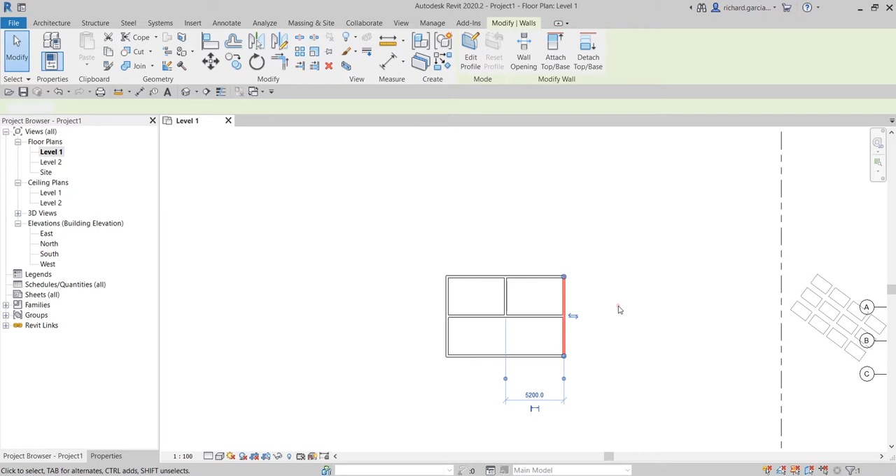All right, so the first option that we will be talking about is select links. This is the icon for select links. As you can see, it is disabled. By the way, I have here an AutoCAD link file, then I have here just simple walls I created, and then I also have a Revit link model.

Okay, so the select links option, when you enable it, lets you select link files and individual elements in the links. So what are those link elements that I'm talking about? Link files can include the following: our Revit model, our CAD file, and even if you have a point cloud linked inside your project, you can also control the selection of that using this option, select links.

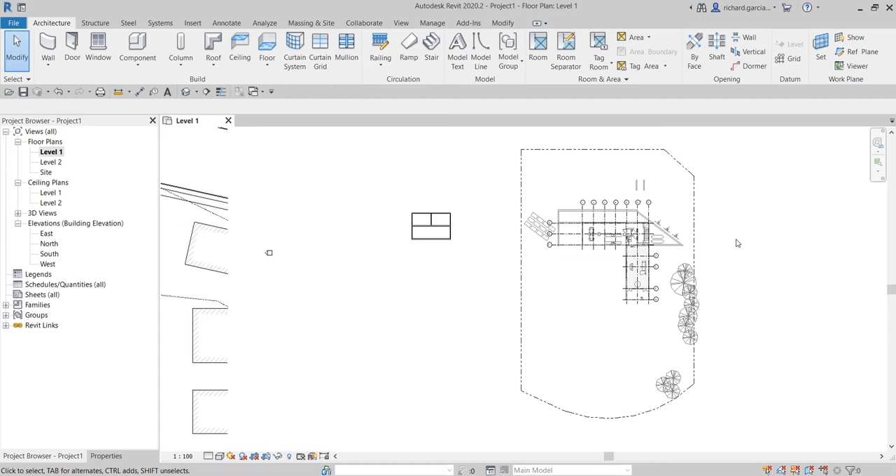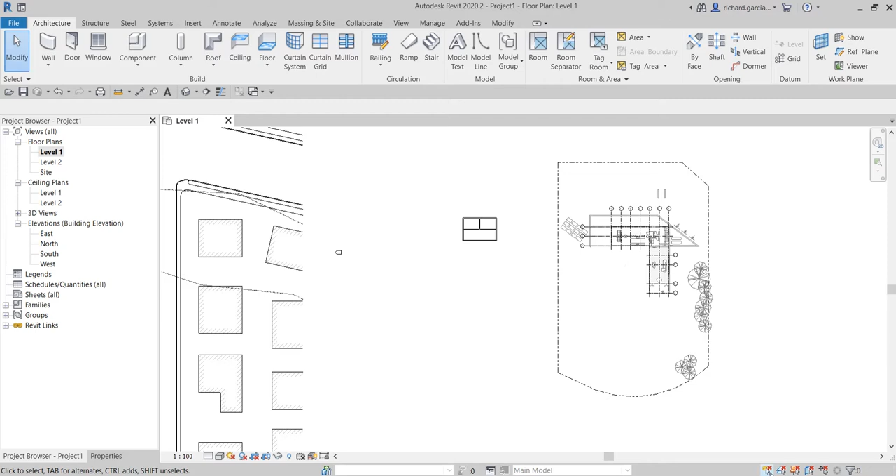Okay, so if this is disabled, as you can see, it's an X, and if you go here, it's unchecked, right? What will happen is you will not be able to select it. By doing that, you will not be able to accidentally move, delete, or drag your link model to another location, which is pretty useful. Usually when we set up our project, we set the select links option to be disabled or unchecked.

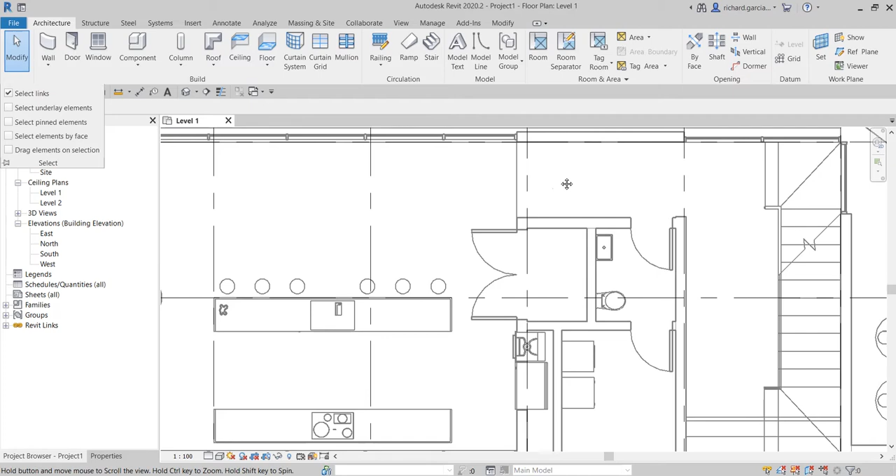But if you ever want to check the elements, for example, what type of door this is, just make sure you enable select links here by clicking this one. As you can see, the X already disappeared. That means it is enabled. And if you click here, it's already checked. By doing that, you'll be able to select your link model like that.

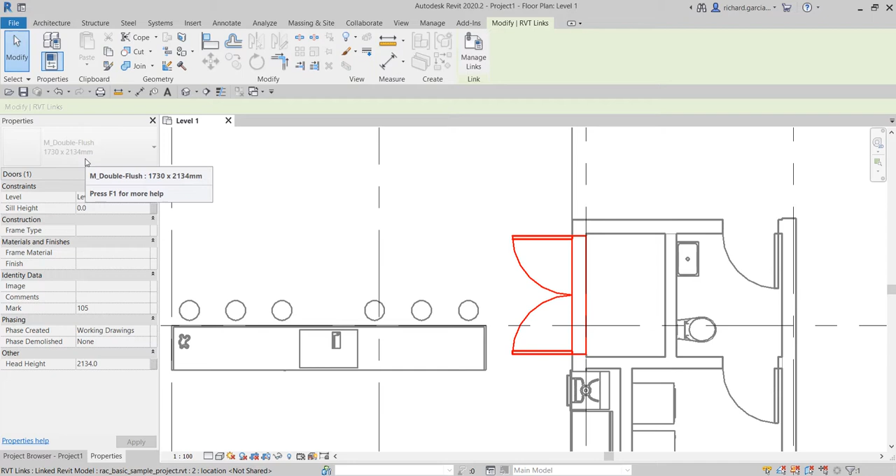And if you want to select individual elements, you just hover your pointer like that, press Tab, and there you go. You're now able to highlight the door, and then you can click it. And if you check the properties, you will know what the properties of that door are. So for example here, Tab, click, and there you go.

But if you do not want to touch, move, or accidentally delete your link model, it's better to disable or uncheck select links here, just like that. That's why some users have a problem: why is it I cannot select my link model?

It's because of this option. Okay, so that's the answer to your question. Now, after the select links, take note, just remember you can also apply this on your AutoCAD drawing.

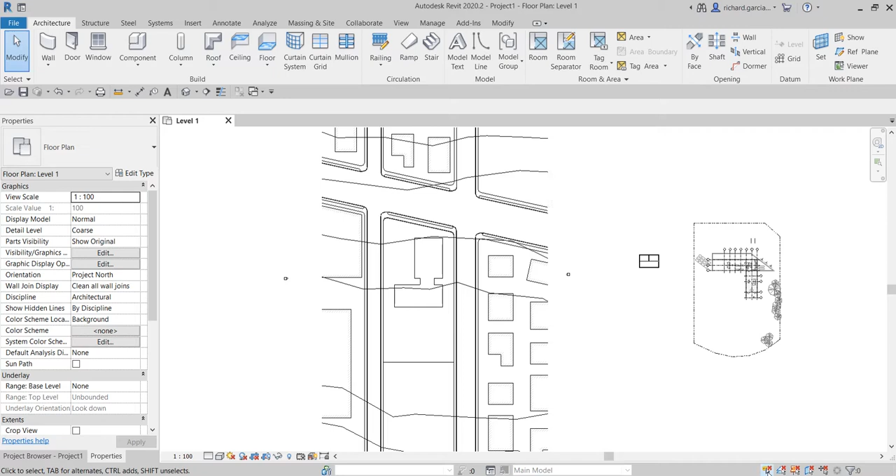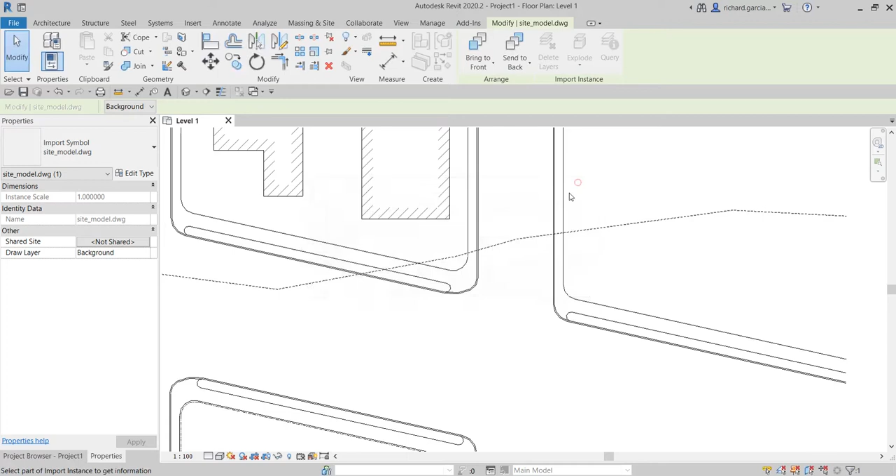See, I also cannot select my AutoCAD drawing. But if I enable this one, I am now able to select that, and I can now query what layer this is, for example. So there's a query tool, and then I can click that one. I'll be able to check out what layer that is, or I can even hide that in the view or delete that. Okay? So your linked model, AutoCAD link, Revit link or point cloud link, it's being controlled by this one.

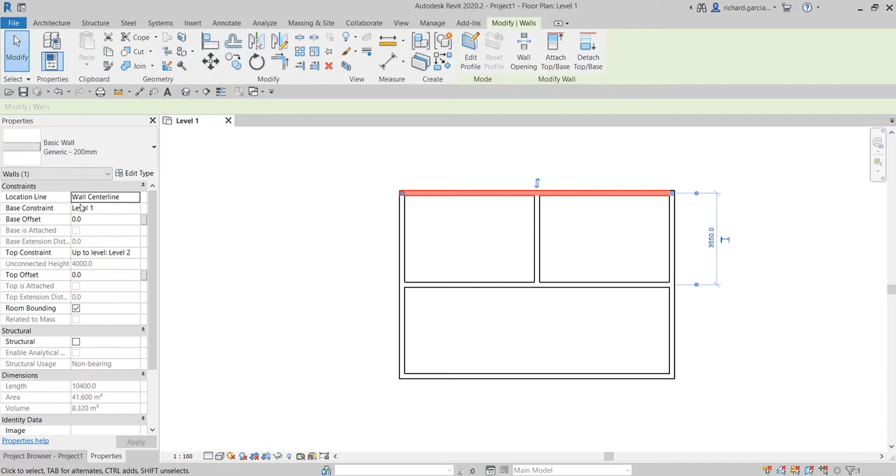Now the next option is select underlay elements. As you can see here, I already created a wall that starts from level 1 up to level 2. Now, if I move to level 2, the walls that I created from level 1 to level 2 are now considered an underlay. So if you're having a problem, why can't I select the walls I created below on my level 2? Well, it's because the select underlay elements option is disabled.

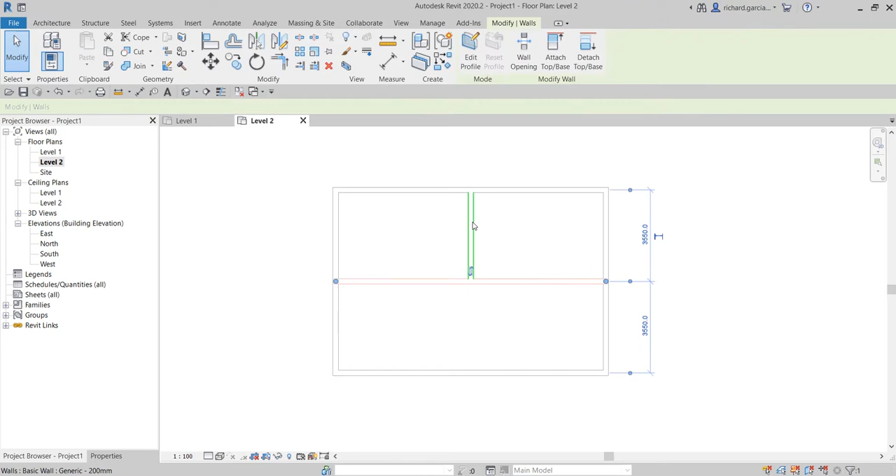You enable the select underlay elements option when you want to be able to select the elements contained in an underlay. If the ability to select underlay elements interferes with your ability to select elements in the view, you can disable this option. When select underlay elements is disabled, you can still snap and align to elements in the underlay. So just remember that. By the way, if I enable this, I'll be able to select the underlay elements. If this is disabled, you cannot select that.

Now, the third option is select pinned elements. You enable it when you want to be able to select elements that are pinned in place and cannot be moved. If the ability to select pinned elements interferes with your ability to select other elements in the view, you disable this option. For example, you may want to omit pinned elements from a crossing selection, so you just disable that one so they will not be selected.

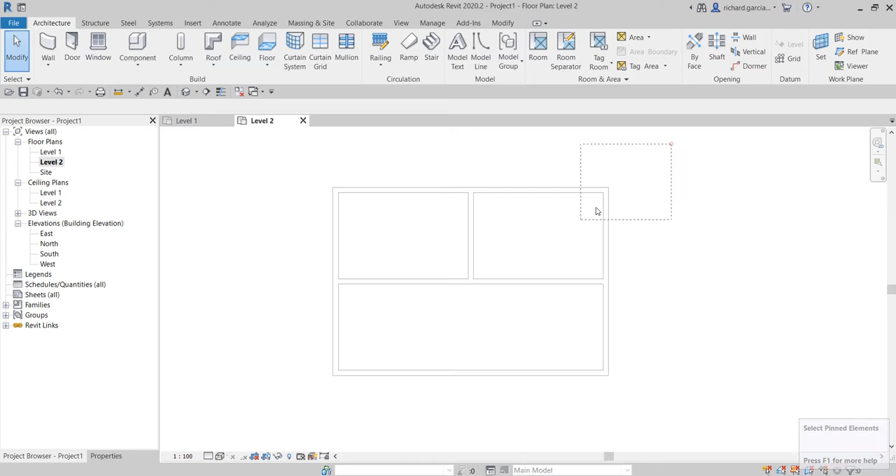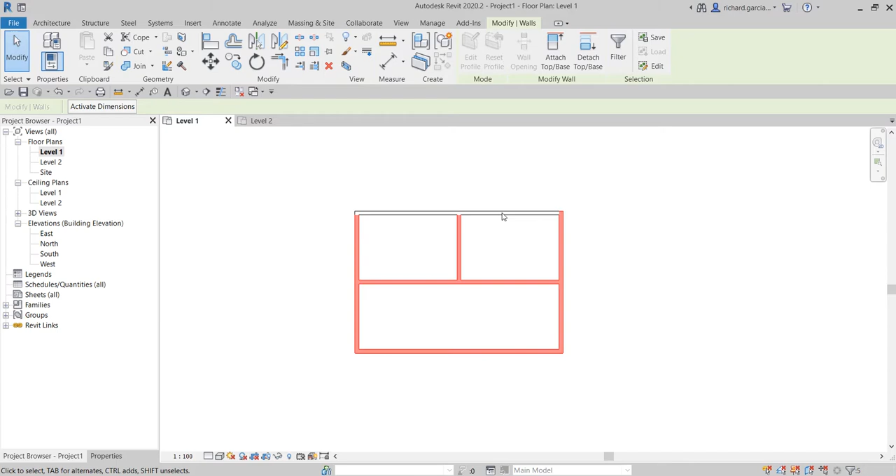Let me just pin the object to show you. This one, I'm going to pin that. There you go, this one is pinned. If I disable select pinned elements, as you can see, I can only select those elements that are not pinned. It's pretty useful if you do not want to move pinned elements or accidentally relocate them.

It can also apply to your pinned link model, Revit model or CAD drawing. But why would you do that? You just need to disable select links here. But if you want, you can try. I'm going to select this one and pin it, then disable select pinned elements. As you can see, I cannot select that one either. Even though select links is enabled, if select pinned elements is disabled, you will not be able to select pinned linked elements. So that's the use of select pinned elements.

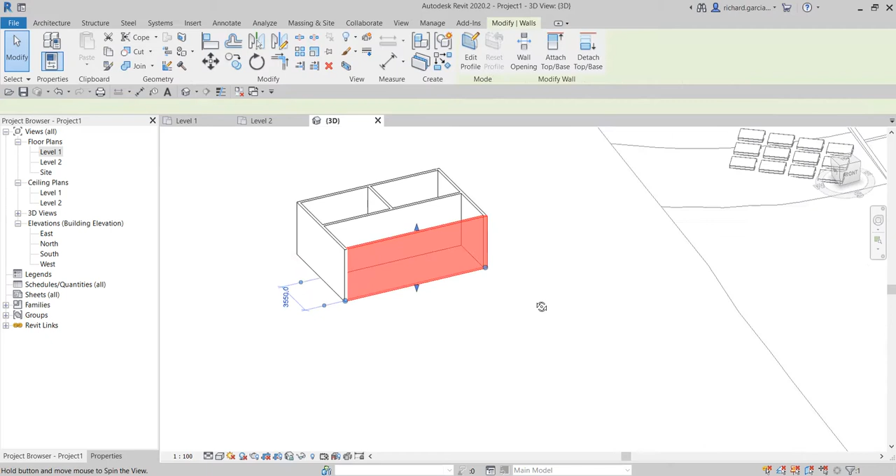Now the next option here is select elements by face. For example, if I go to the 3D view, okay, so for this one, there are some instances where what we want to do is click the face to select this wall here. Now the problem is sometimes we cannot do that. It's because of this option.

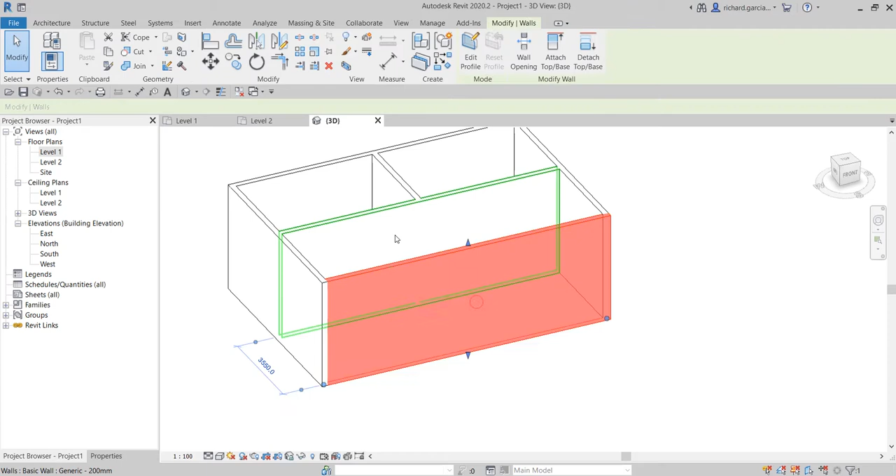Select elements by face. You enable this option when you want to be able to select elements by clicking the interior faces instead of edges. Usually we click the edge, right? Just like that. But let's say we want to select the face. You just enable that one, click it, and then you can click the face. You are now able to click the face instead of selecting the edges.

Okay, just like that. Whoa, why is it I can't? Oh, this one is pinned, sorry. So let me just click that and unpin that one.

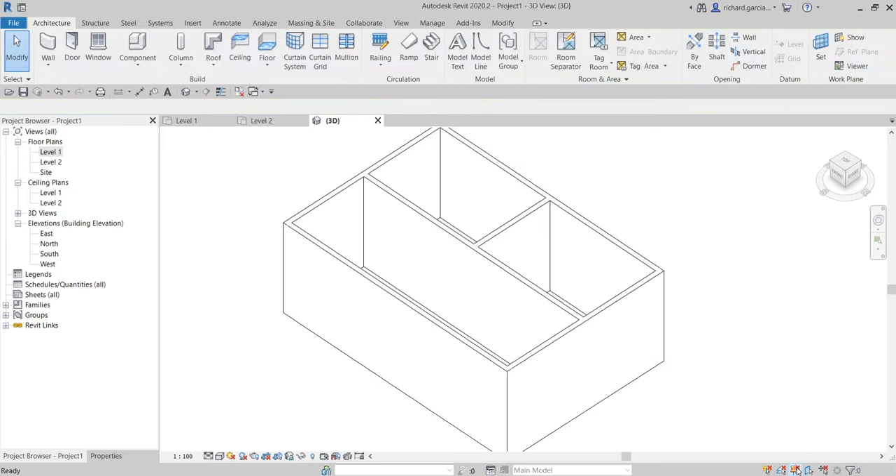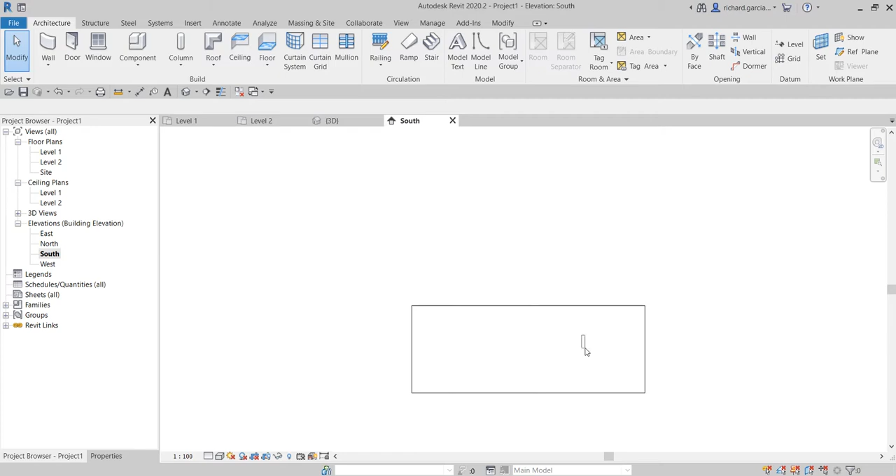Disable. Okay, see, I can now select the face. I can select the face. Even on the elevation view, if I go to the elevation view, you see I can click the face. So if this is disabled, you cannot select that. This is useful if you want to use a crossing selection and do not want to select that element.

So when this option is enabled, just remember, it applies to all model views and drafting views. However, it does not apply when a view's visual style is wireframe. So if you disable this, you must click the element's edge to select the element.

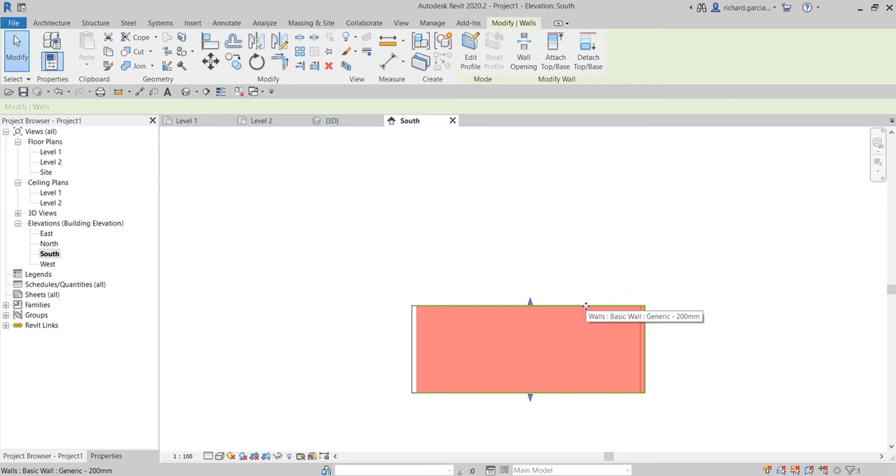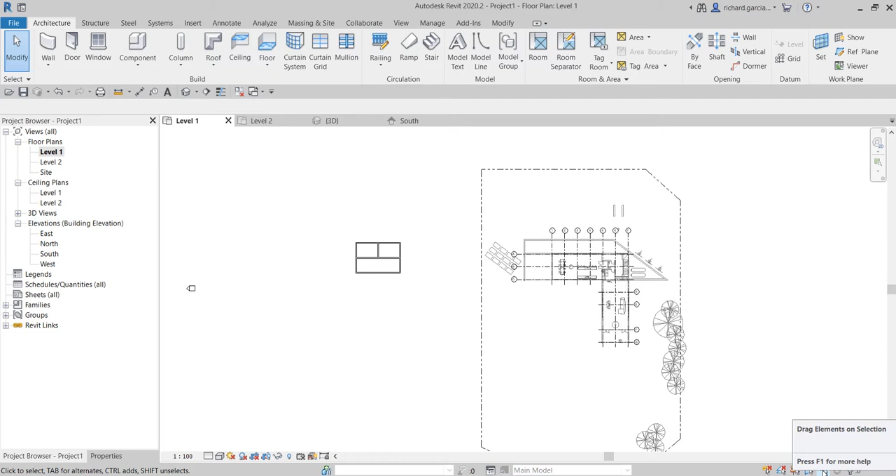Now the last option here to control our element selection is drag elements on selection. Let me just go back to my level 1. You enable drag elements on selection so you can drag an element without selecting it first. Just like this one, I'm going to enable this one, and then I'm going to click this and then drag, just like that.

You do not need to select that and then drag. So the moment you pick the object, just hold your left click, you will now be able to drag that. You click, hold your left click, and then you can drag.

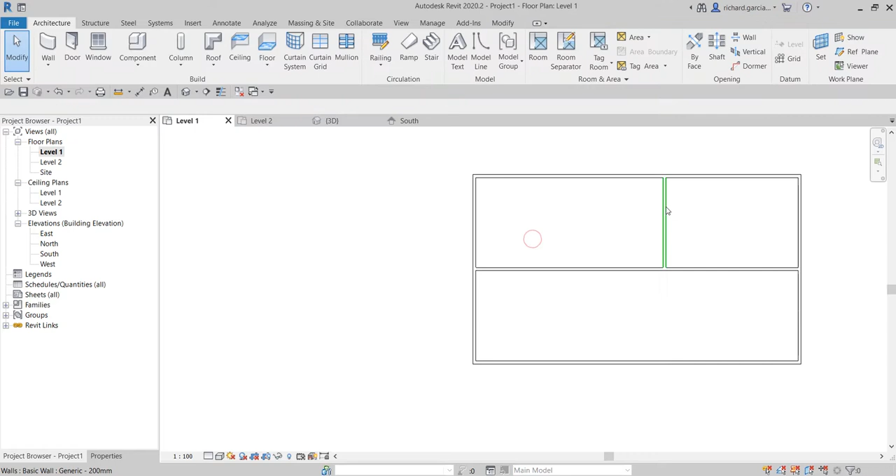But if this is disabled, just like that, you see, if I click this and then hold my left click, I will not be able to drag. I click, hold my left click, and I cannot drag it away. So I still need to click that first, and then after that, I can drag. But if this is enabled, I just need to click once, hold the left click, and then you can drag like that.

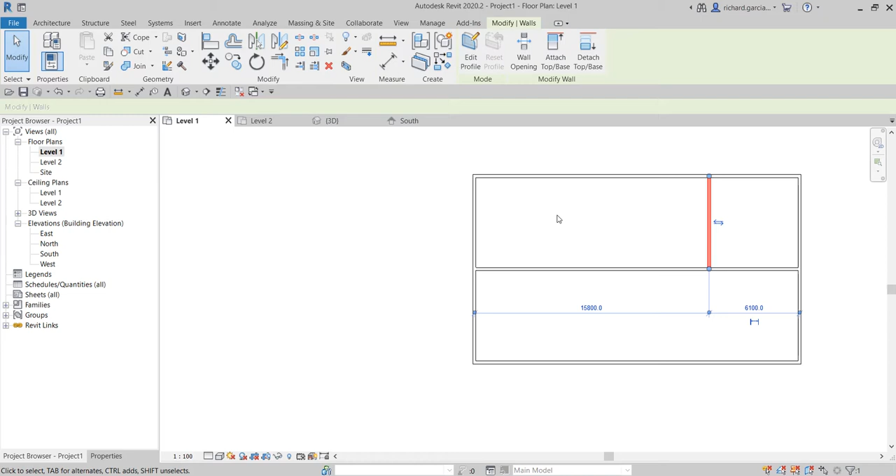So to avoid accidentally moving an element when you select it, it would be better to disable this one. And remember, this option applies to elements in all model categories and annotation categories.

So these options apply to all views. They are not view specific. So if you enable select links here, it will not only apply on your level 1, but it also applies to all views. Remember, all of these options apply to all views, they are not view specific. You can enable and disable these options at any time during the current session as needed.

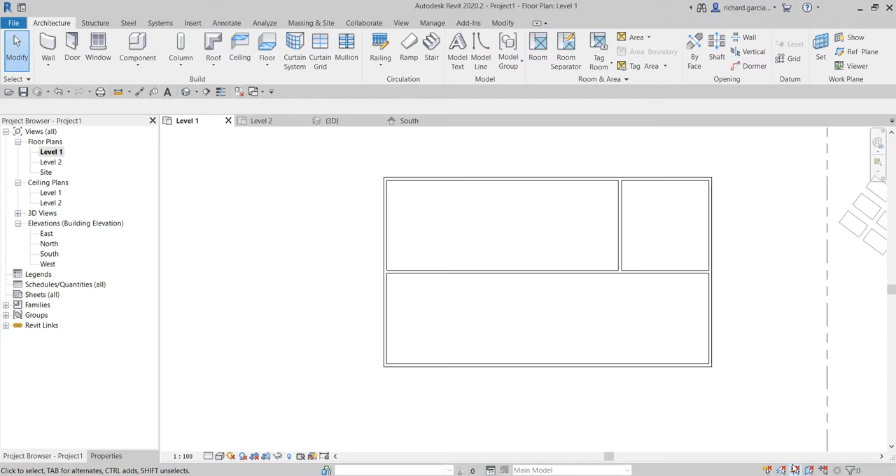Hopefully you learned something from this video about options to control element selection.